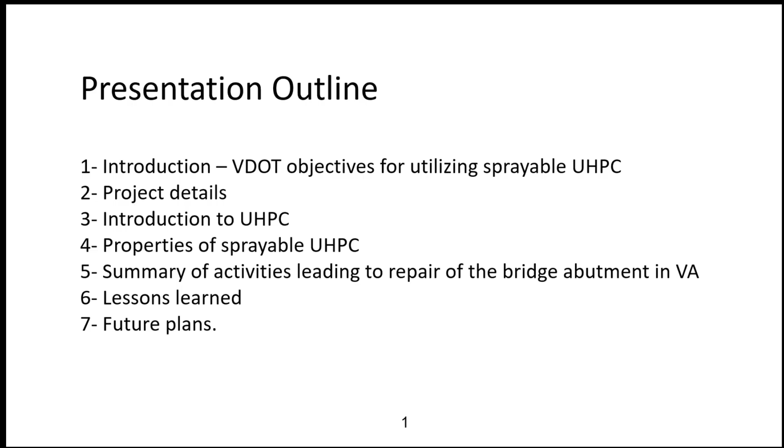So the bridge is located on the ramp, we call it ramp H, and that is from I-495 to US 50 interchange. The 495 is the beltway around Washington, DC, and this bridge is approximately 16 miles from the White House and from the District of Columbia.

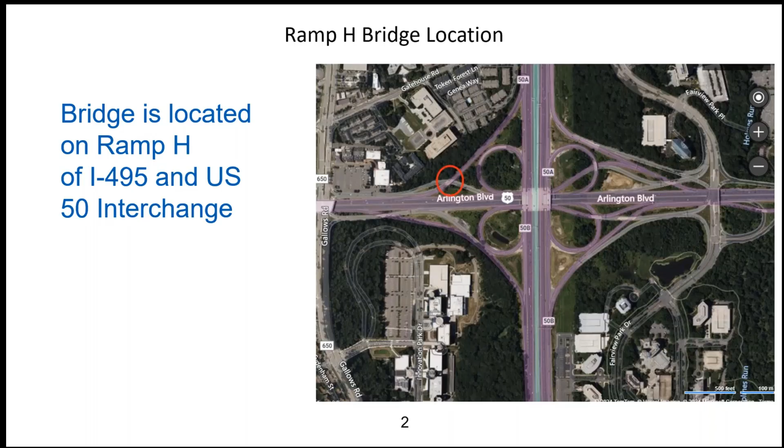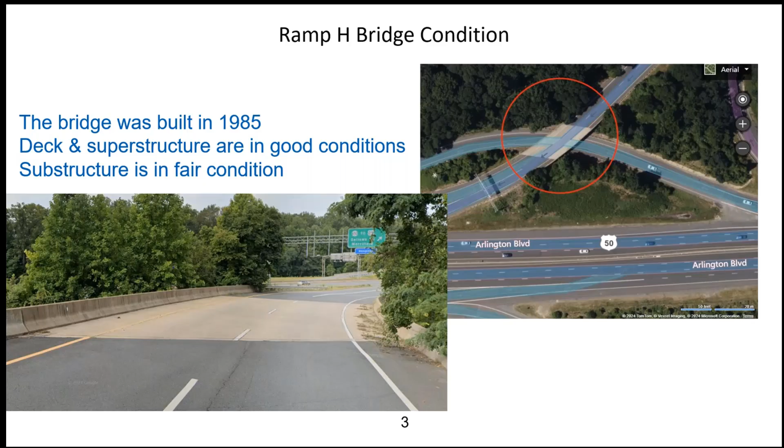Next slide, please. So as you can see in the picture, it's a very busy and congested area where the 495 is a main thoroughfare, the beltway around Washington, DC, and the ramp is ramp H from US 50, which is another busy thoroughfare. So the bridge was built in 1985, and the deck and the superstructure are in good condition. The substructure is in fair condition, and you can see the pictures here.

Next slide, please. So as you approach the bridge, you could look at the abutments as circled in the red square, the areas of the repair, one on the left and one on the right. These are symptoms of leaky joints, where the deicing salts cause corrosion and spalling of the concrete. This is exactly what happened in this case.

And of course, if we repair those abutments, being vertical walls, the repair usually either involves adding concrete cast in place, which means usually a minimum of 4 to 6 inches, which is significant weight and significant effort, and adds dead load to the substructure and the foundation. Or spray applied, or shotcreting, where you can apply a thin layer to provide the protection. In this case, UHPC will provide the protection and restore the durability of the abutment.

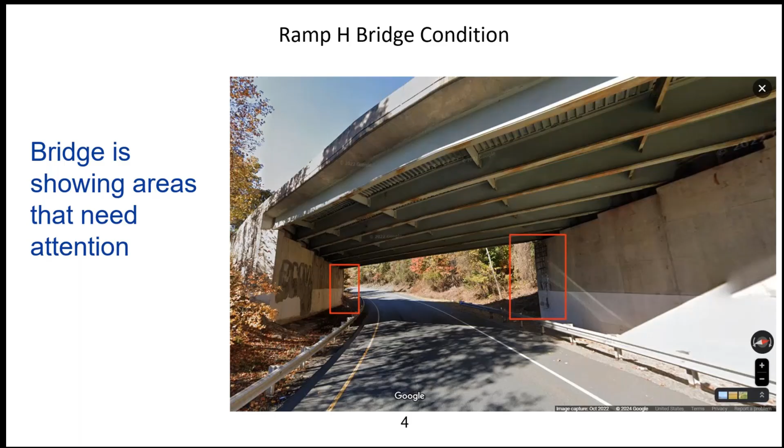Next slide, please. So again, this is a close-up of the repair, and you could see the spalls where the corrosion of the reinforcement is visible.

As preparation to the spray applied, we removed all the loose and delaminated material, and sandblast or pressure wash depending on the case. In this case, it was a sandblast to remove all the loose and corrosive material or corroded steel residues. This is obviously a preservation action where we preserve the bridge for the long term.

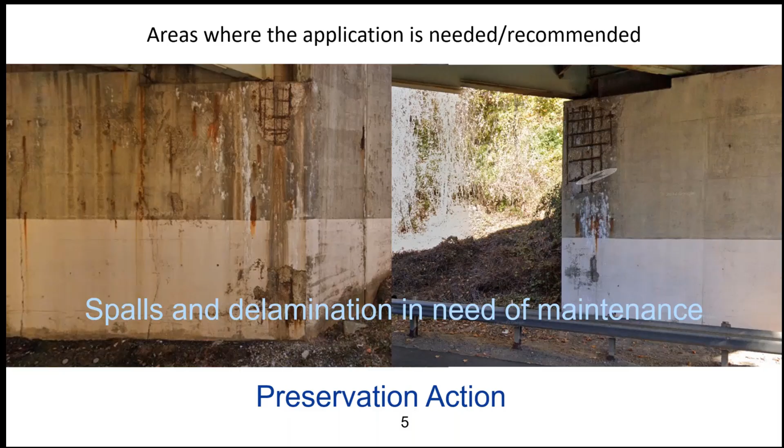Next slide, please. So this is a close-up after the preparation, where you could see all the loose and damaged material has been removed. The steel is exposed, and the bridge is ready to receive the spray-applied UHPC.

And again, one of the main issues, or one of the main preparations, is saturated surface dry, where the concrete is prepared to receive the spray applied UHPC. Next slide, please.

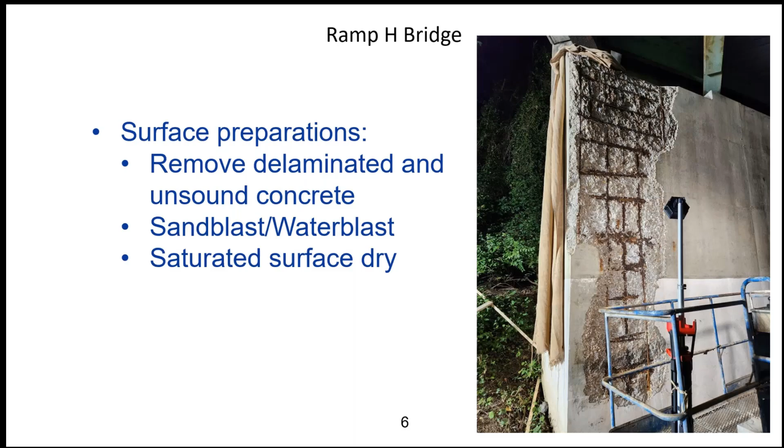So here are pictures of the application, where you have a man lift with the equipment ready for the application. So originally we had one side as a trial test, and the other side was supposed to be the actual repair, but we ended up switching around due to the traffic control.

So the quantities of the material, because the material was brought from FIU on a truck with all that, was not enough to do the entire repair. However, it was good enough to show that the repair actually works, and the spray applied UHPC is a good technology that will provide the protection needed, as well as the restoration of the bridge to serviceable condition.

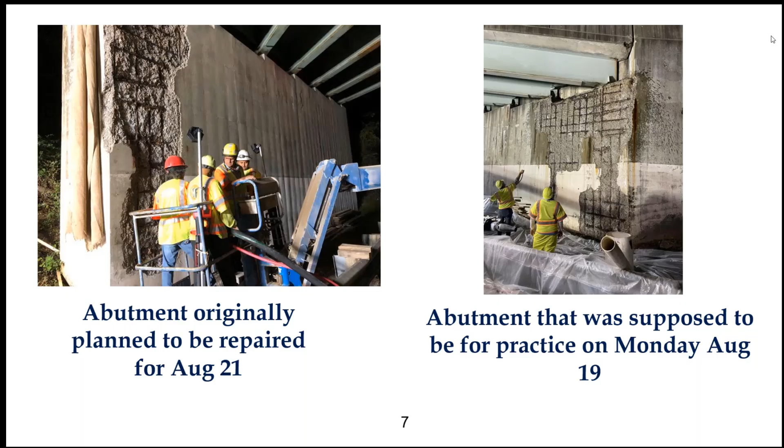At this point, next slide, please. So it would be noteworthy that the FHWA published, in the EDC News Innovation of the Month, the ultra high performance concrete spray applied or sprayable, and it was published on February 6th, for your reference if you would like to look it up and read it. It's a very good technology for the applications that we're referring to.

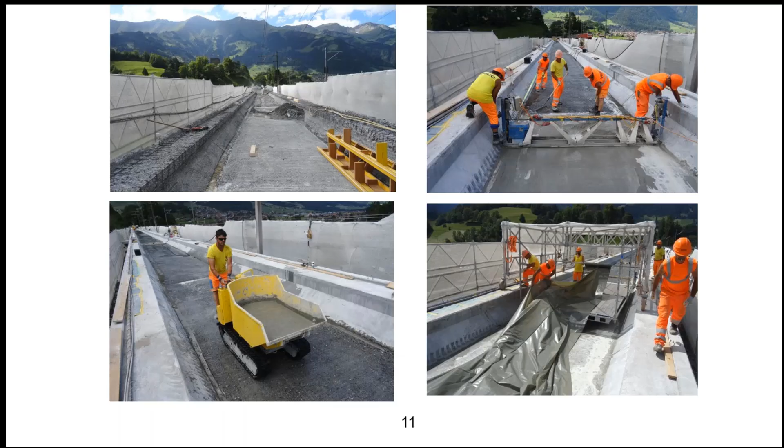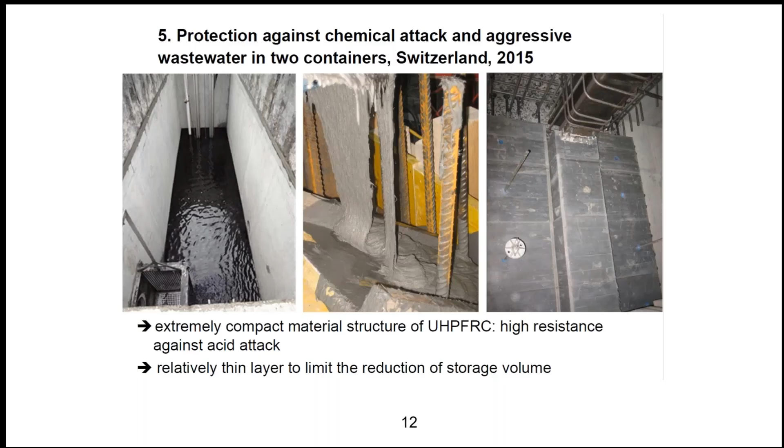So I'll show you some results. The rapid chloride permeability number, the Coulomb number for this material, is very low—less than 100, compared to 3,000 for conventional concrete. That's one of the reasons this material is so durable, and durability is really one of the main reasons we use it. It's a wonderful material for retrofit.

The reason for that is because ultra-performance concrete doesn't have that much water—water-cementitious ratios are in the order of 0.2, 0.18. So if the surface of the conventional concrete you're spraying over isn't adequately moist, at least 24 hours before the spray, it's going to absorb all the little water that's in the UHPC, and that's going to cause a crack.

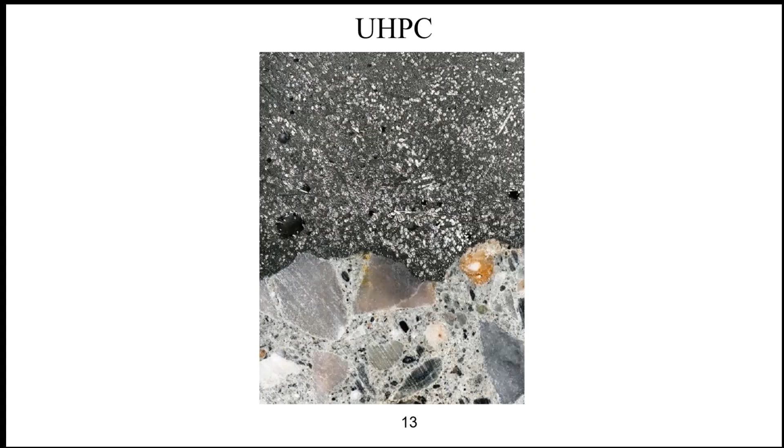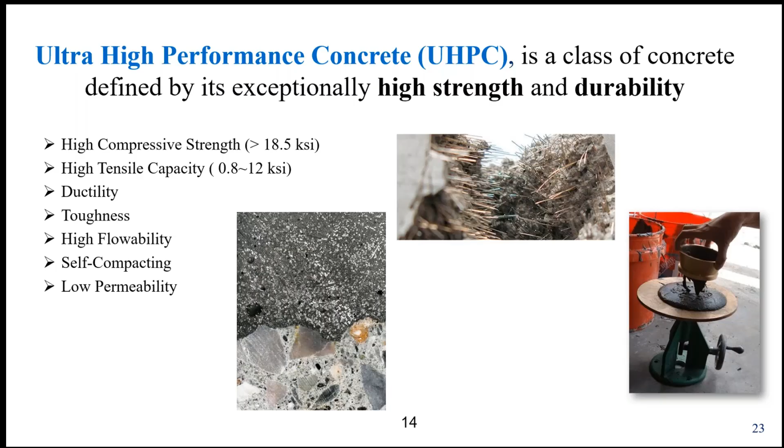Right now, FHWA defines UHPC as a material that must have more than 18.5 KSI compressive strength. But in actuality, you get into 24, 25 KSI at 28 to 56 days. It's very flowable—really, slump doesn't mean much in the case of UHPC, it oozes. When you do the flow table test, for sprayable concrete you need around 6 inches, but for cast-in-place you're looking at something close to 9 inches.

So let me share with you some properties of ultra-performance concrete. At FIU, we are conducting a tremendous amount of work in this area. At IBT, ABCUTC, we have developed open source UHPC for conventional applications and also for sprayable applications.

For conventional applications, without going into too much detail, the cost of the material is a fraction of the commercial version that are available. And we are not the only ones that have developed the open source UHPC. University of Michigan has developed open source, New Mexico has developed, as well as a couple of other universities. I'm pretty sure that by time the cost of the UHPC is going to go down, and as the construction industry gains confidence, I think its application is going to increase.

One of the main reasons for the high cost of the UHPC is really the steel fibers. In one cubic yard of UHPC, we use about 250 pounds of steel fibers.

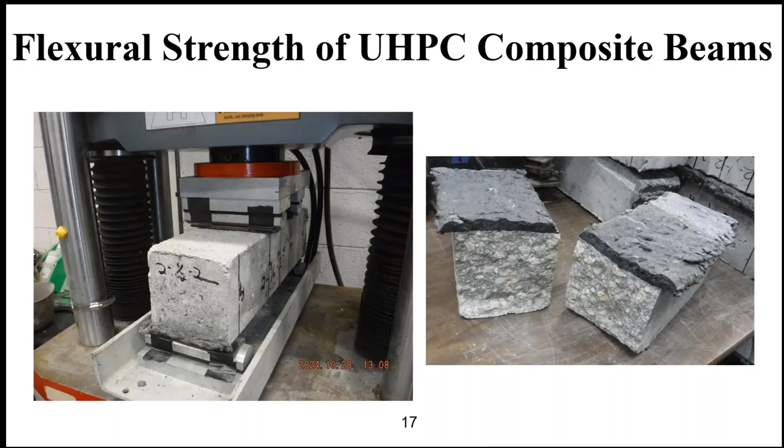Let me just show you some data that we have. These are small beams sprayed with the UHPC, and then tested under 4-point loading. The surface was prepared, the exposed aggregate, it was moist, and then it was sprayed, so no reinforcement, nothing else. You can see that the tensile capacity at the bottom of that beam, or the modulus of rupture, increases by increasing the thickness. For durability applications, I'll show you one means so maybe you can decide what should be the thickness that you should apply.

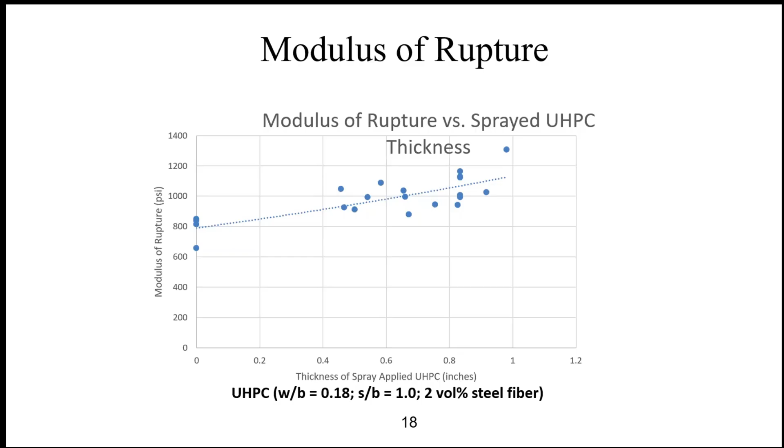We've done quite a bit of testing with the direct pull-off test. Another way, we have sprayed - we've done lots of tests. These are some of the old pictures, actually. We have sprayed the UHPC, and then did a direct tension test, following ASTM C1583. I can tell you that we've never seen the failure take place at the interface between the normal strength concrete and what was sprayed. It's always at the normal strength concrete level. The same results, for cast in place, have been reported by Ben Graybill at FHWA and others.

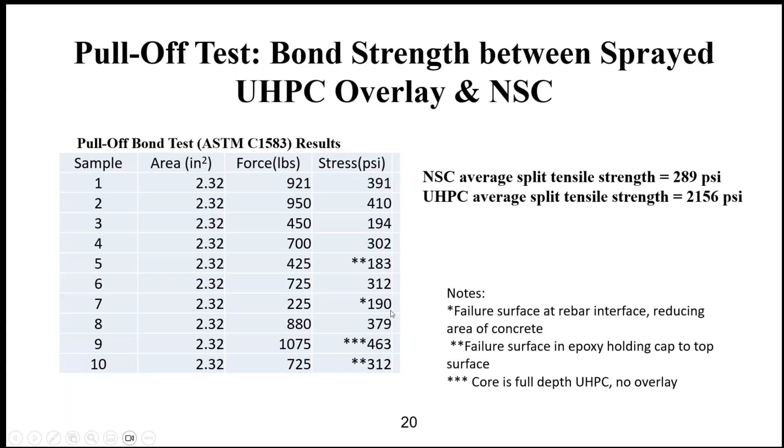That's very good news. You don't have to worry that the bond between the UHPC and the conventional concrete, whether it is sprayed or cast in place, is very strong and adequate, as long as you prepare the surface adequately when you apply the UHPC against it. These are just some of the numbers from the pull-off test - for example, the stresses we obtained were 391, 410 PSI, and so on. Like I said, we never get the failure at the interface.

Some data on the durability. This is work others have done - FHWA, Ben Graybill, and other people have done work in this area, freeze-thaw. This is a standard ASTM freeze-thaw test. These are all UHPC, this is not a spray.

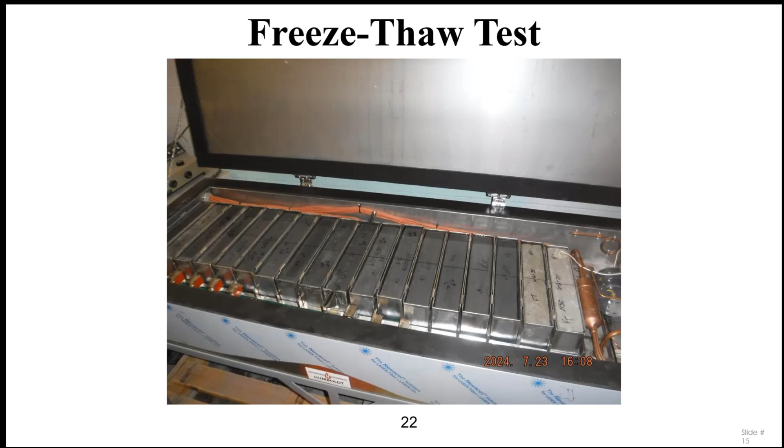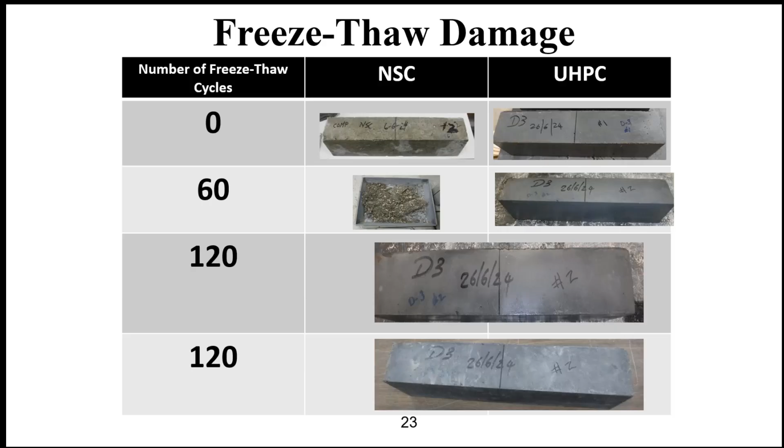Right now we are actually conducting freeze-thaw on non-standard samples - conventional concrete with UHPC applied to it, and we are running it through freeze and thaw cycles. I don't have the data on that, but for all UHPC, even after 365 cycles, absolutely no mass loss, absolutely no damage to the concrete. So the durability of this concrete is really one of its main properties.

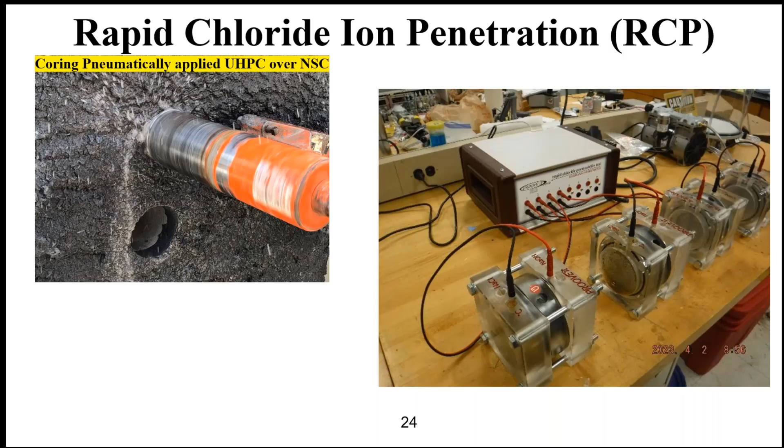We have done some tests where we took cores out of concrete that's been sprayed, and then ran rapid chloride permeability tests on these. This slide kind of shows you the data. For example, with just plain reinforced concrete, the number varies depending on the concrete - 2,000 to 3,000 coulombs, even some very large numbers. But if you apply just 0.5 inch of sprayed UHPC, you can see it's going down. When you get to one inch sprayed, or 0.75 inch, you're really looking at 200-300 coulomb for the RCP numbers.

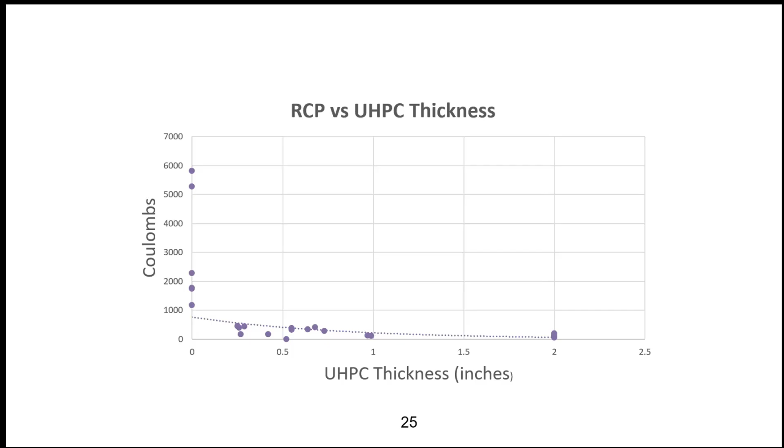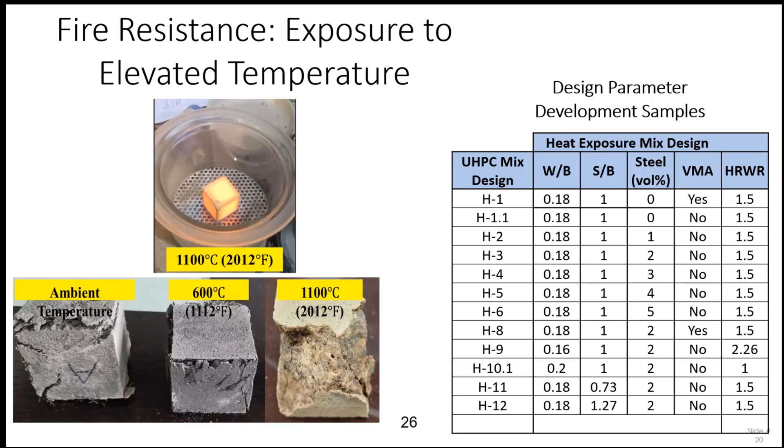We are also doing some fire tests, because there is interest in what happens if an accident occurs - if a fire catches, let's say, in a truck, what will happen? So we are doing fire tests on this material. I don't have the results to show you, but this is some preliminary stuff we've seen. We varied the percentage of the steel. Interestingly, we are seeing that the compressive capacity of the samples - these are cube samples cooked in an oven and then subjected to a compressive test - up to about 300 degrees, if you heat it for a couple of hours then take it out and do a compressive test, the strength actually increases.

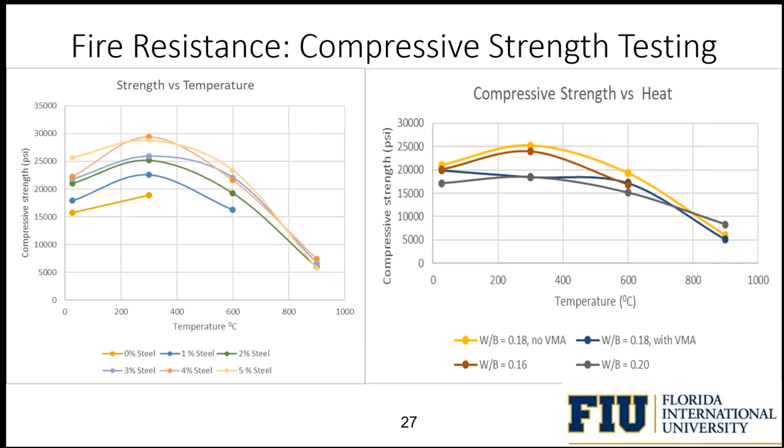We don't quite understand the mechanism of that, but others have reported the same thing. But if you put the cubes and subject them to, say, 800, 900 degree Celsius, cook it for 2 hours, and then take it out and do a test, of course the strength decreases.

Now shotcrete with UHPC. Now, we did quite a bit of work in the lab, and I'm going to show you a video.

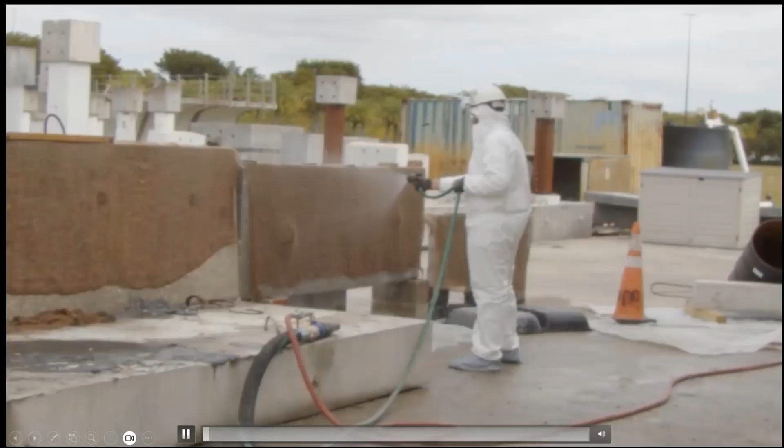Basically, you have to make sure that the aggregate is exposed. You have to make sure that the surface is wet. We have modified our equipment to do the nozzle and so on. Equipment is really key in this case. Of course the mix is important, but having the right equipment matters because this material has lots of steel fibers, and those steel fibers plug the system.

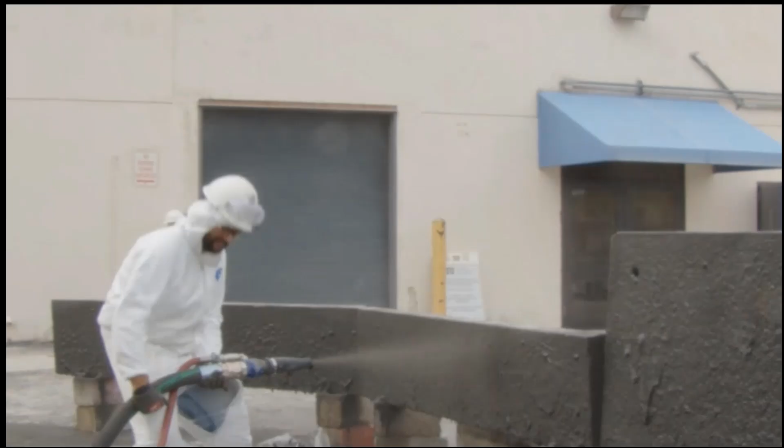But you can see here, I'm just going to show it, you can apply several layers. For example, here you see that we are applying additional layers. But you have to let the first layer dry up a little bit before you apply the next layer. If you use the right mix, the elastic rebound is really minimized.

One of the reasons we started this experiment back in 2018 was, of course, always the question is can you do this successfully in the field? And that was the reason we teamed up with the Virginia DOT with Sam Flaha to do this project.

So what we decided to do, like Sam said, originally we were going to do only the side of the abutment with a small area in need of repair. So based on that, we...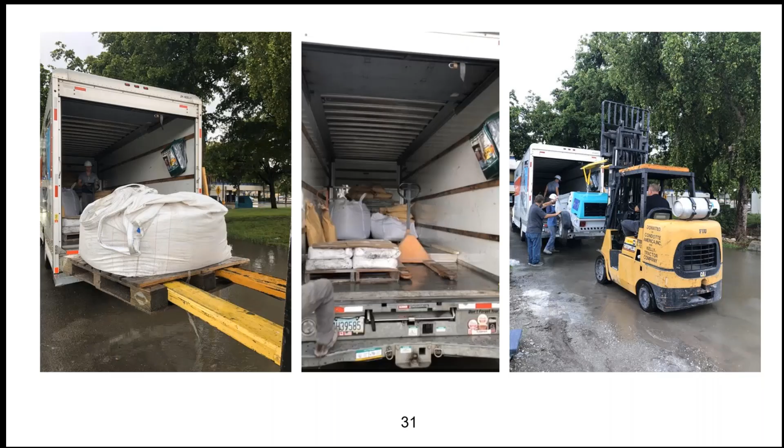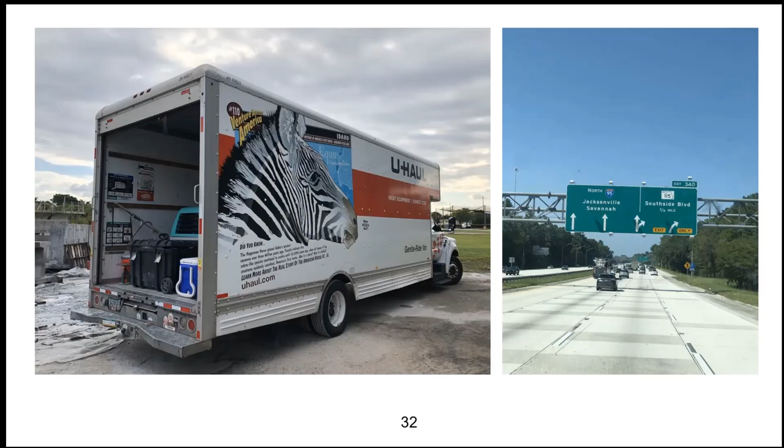Got all the material, and we are using open source. We are using ABC UTC open source UHPC data. This is not a commercial version, just the open source that we have developed, and we measured everything. We shipped it to the Northern Virginia, near Washington DC area, together with our equipment that has been modified.

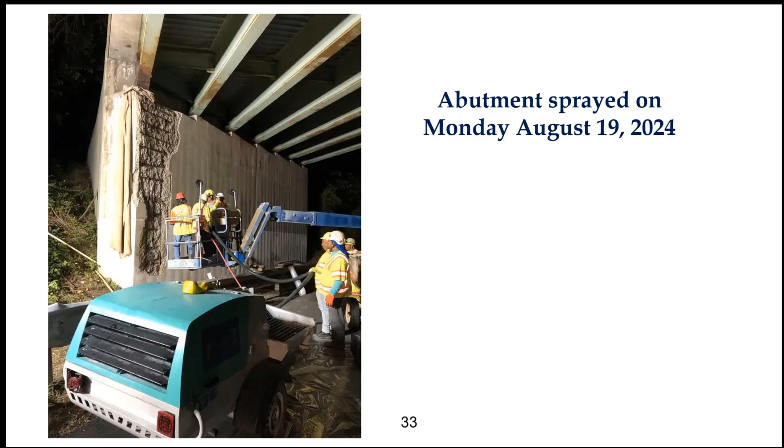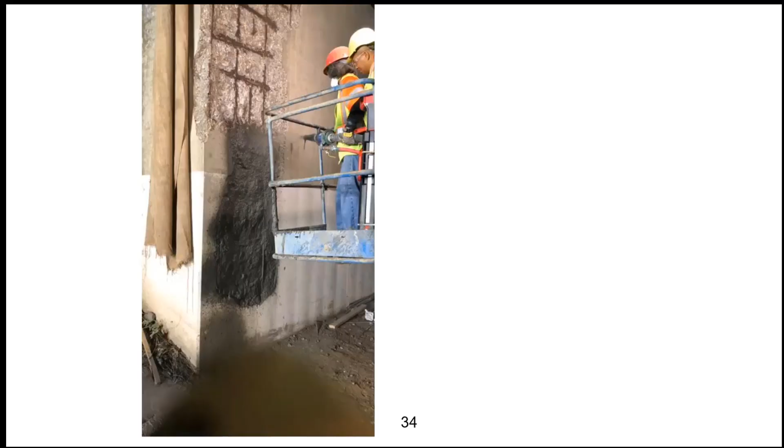So on Monday, August 19, we sprayed this area that you see, and then on Wednesday, August 21st, we did the other area. Here I'm going to show you a few videos of these things, but I'm not going to run it completely. I hope this gives you some ideas.

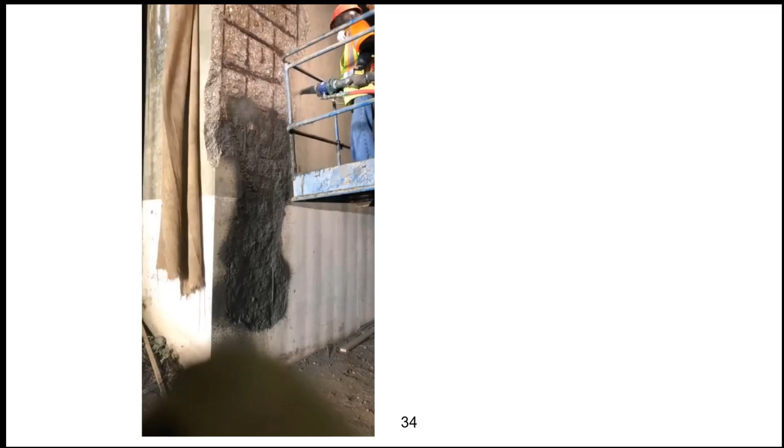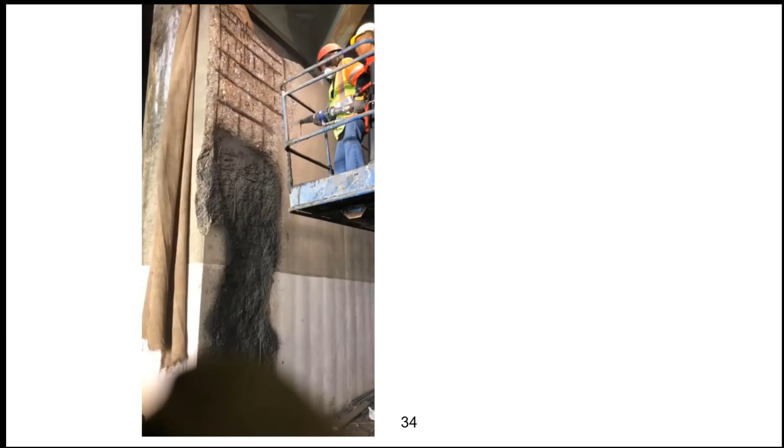By the way, we use the man lift, and the man lift is not really a good platform for spraying. The reason for that is because sometimes when you move the man lift up and down, it really shakes, and that little shake affects things.

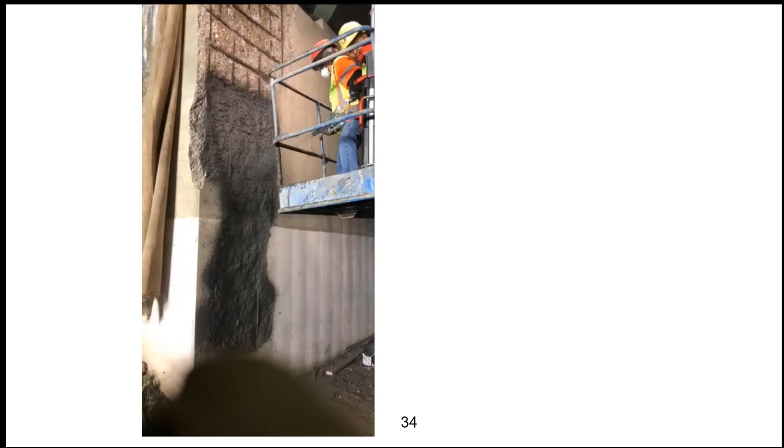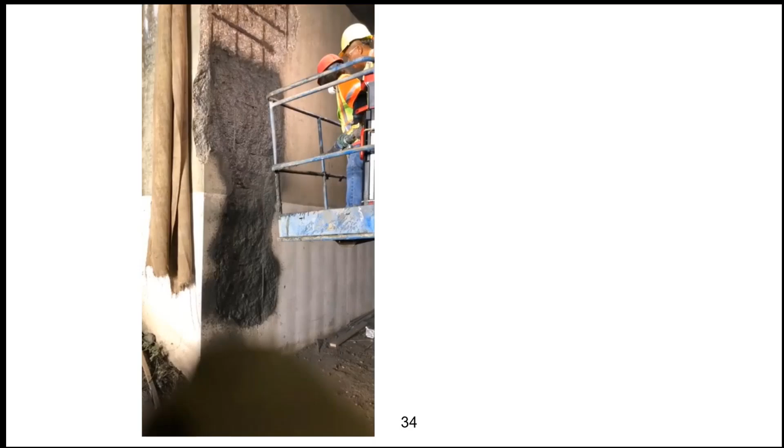But you can see over here that we are applying this UHPC layer by layer. The larger the area is, the better off you're going to be, because by the time you go from one end to another end, that will give you the chance to dry the material.

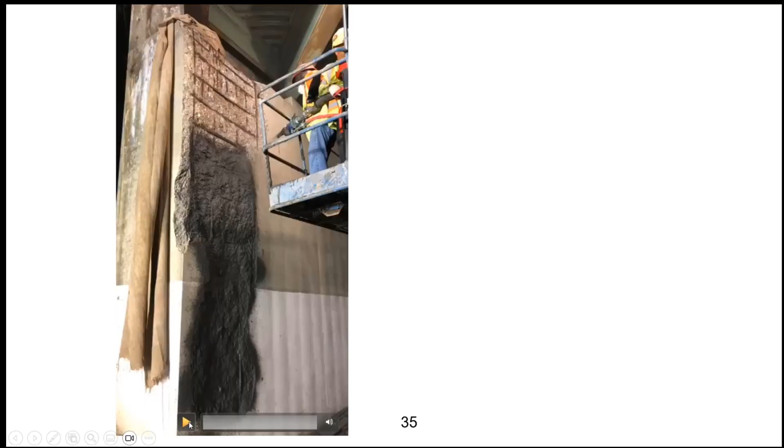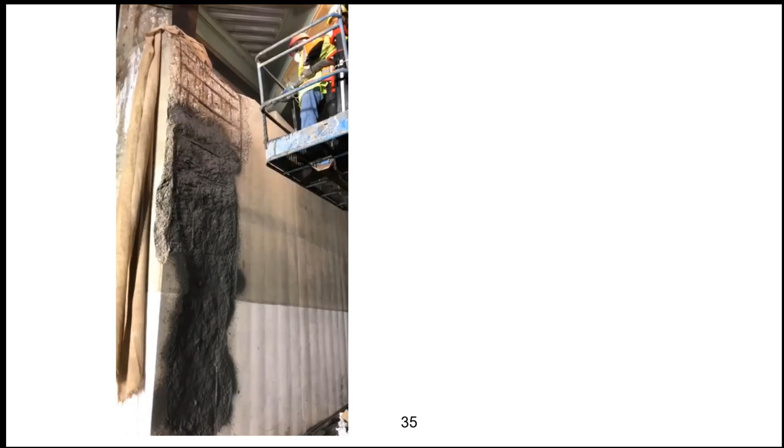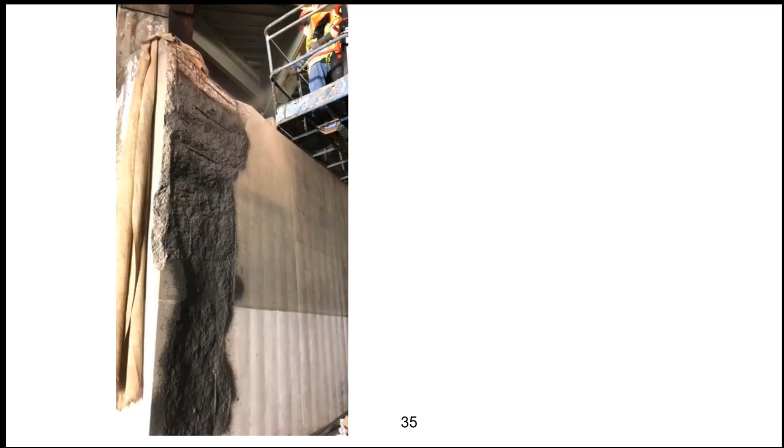This is the same abutment still. Because we had limited materials, I didn't want to repair all of this one, but on that day we did have some extra material. We said, well, let's go ahead and just spray a little bit on the rest of the abutment. So you can see that here.

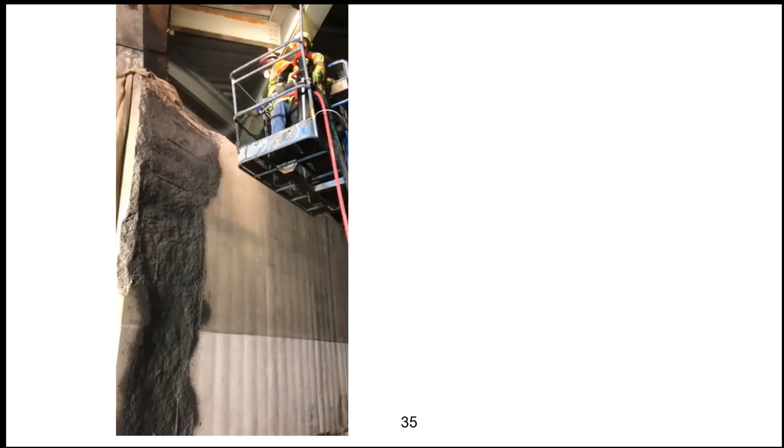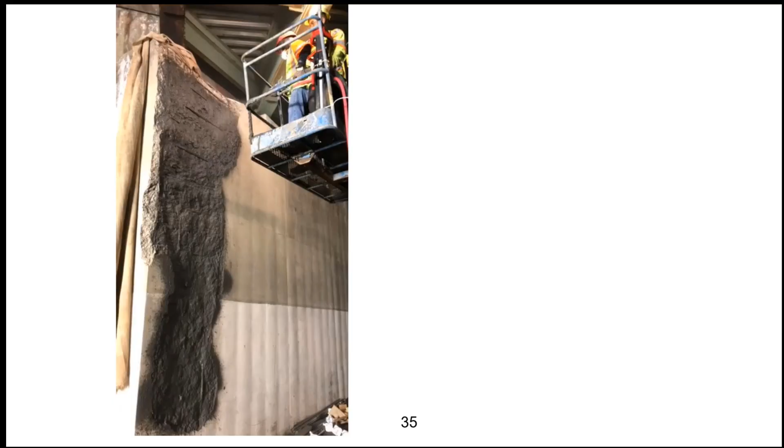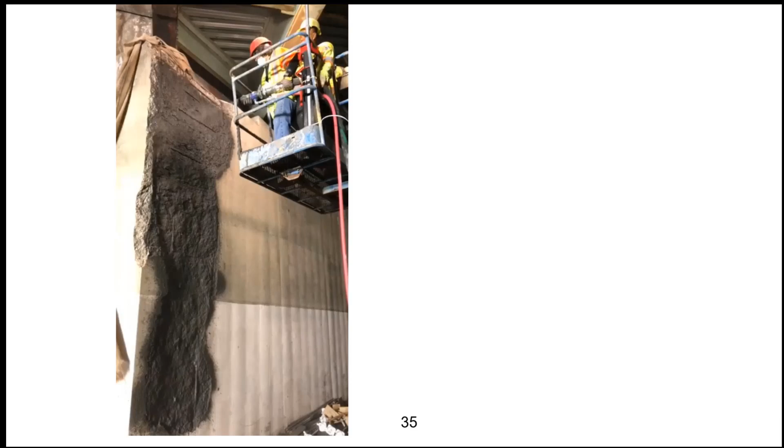And to your no surprise, the nozzle man is none other than Dr. Azizinamini himself. Later I learned that you have to have a certification to be a nozzle man, so I guess I was an illegal nozzle man. But nevertheless, I decided to do this one myself because it was the first application, and we had experimented a lot in the lab.

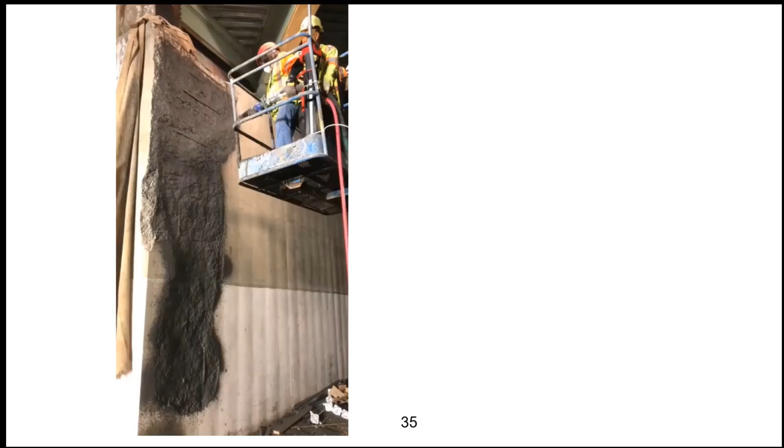Now here is the abutment that we fixed. This was supposed to be the experiment, but as you can see, it's a very large area, and you needed lots of material, but we did not have enough. I think we used about 40 cubic feet of UHPC, and to do both abutments, the whole area, you needed at least about 100 cubic feet, almost 4 cubic yards of UHPC. We didn't have that much material, so they sandblasted it and exposed it.

Now, when you design an abutment, you put a minimal amount of reinforcement, so it's not that critical, especially in non-seismic areas. We did ask them if they wanted to add new reinforcement, but they decided just to keep the reinforcement as is, expose the aggregate, wet the concrete, and it was ready to go.

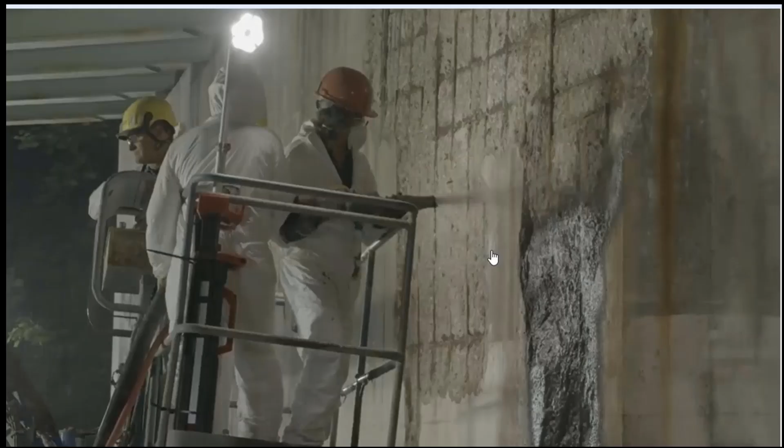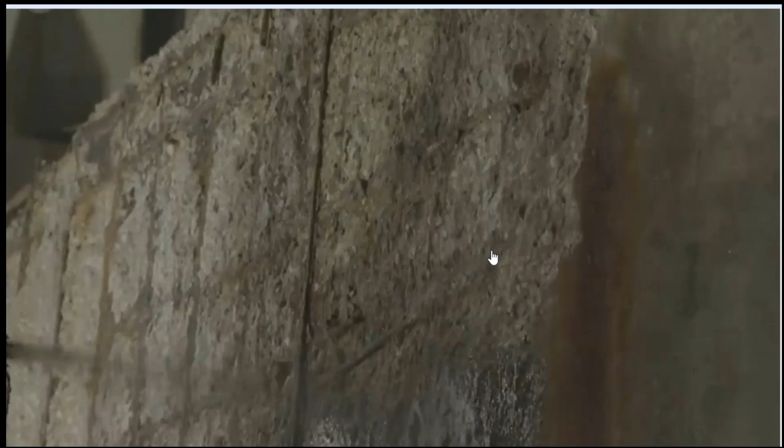Here's another video. So as you can see, this is after applying it. In some places we had more than 1 inch, going back and forth with several layers. When you apply this spray, you go from one end to another. The larger the area is, the more chance the material applied to the first region has to dry up before you come back. So if you apply layer by layer, you have to let the first layer dry a little before going to the second layer. So this is another area.

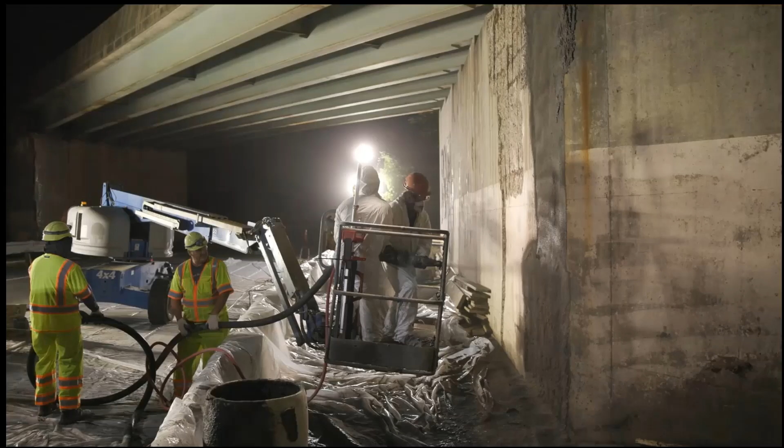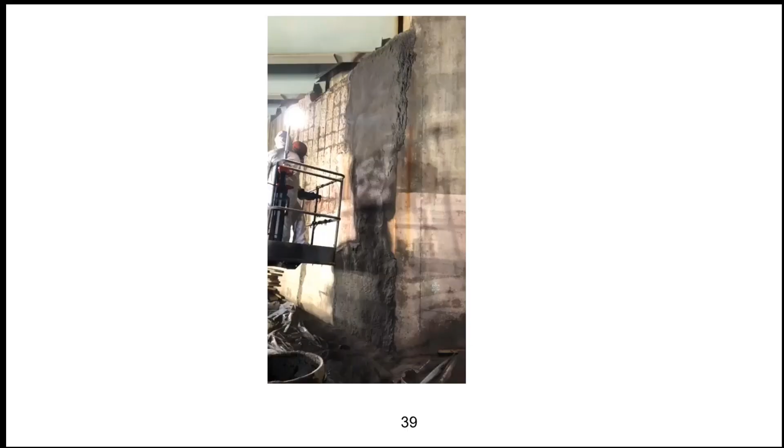So as you can see, there is really no elastic rebound. So, finally, this is another shot.

And finally we applied this curing compound, a white pigmented wax-based curing compound. We were super conservative with respect to curing. We applied the curing compound, then put on wet burlap and a plastic sheet. You don't need to do that, but we decided to, just to prevent potential cracking and so on.

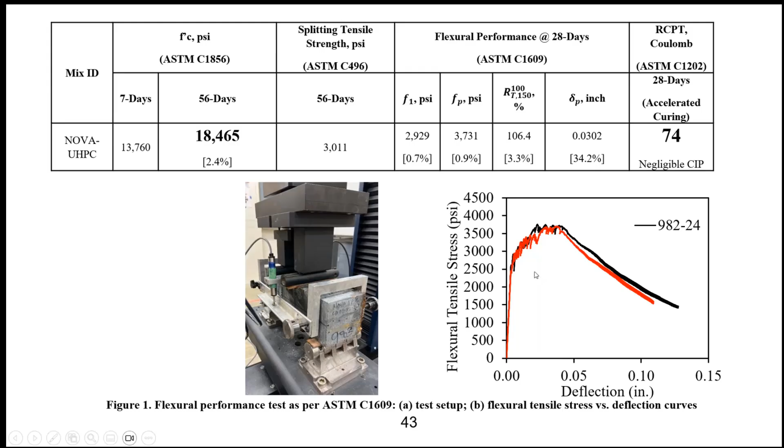Okay, now let me move on. I want to spend a little time on the lessons learned. I always say that a sprayable UHPC, you need to approach as a system. What do I mean by that? In a system you've got so many elements - the equipment, the personnel, the material, the operation steps - everything has to be very well organized. If one element doesn't work, the whole system fails.

And that's probably one of the reasons why this hasn't been applied successfully in the field so far, at least by August. We were able to apply this successfully in field conditions for the first time. So that's what I'm saying - it's a system. This is not something where you read a manual, go in the field, and just apply it. It doesn't work that way.

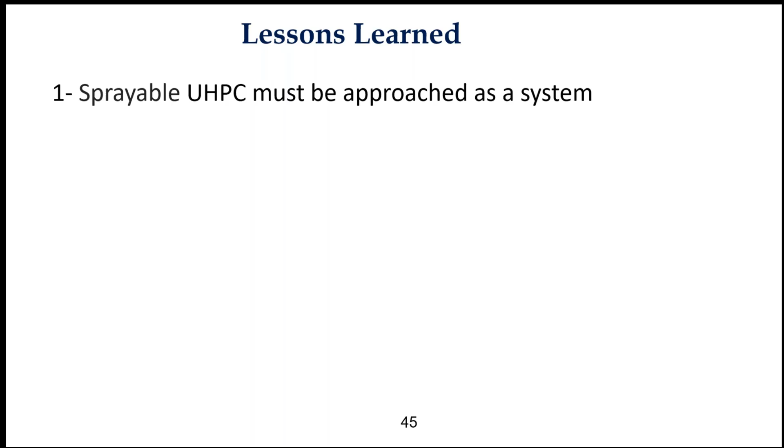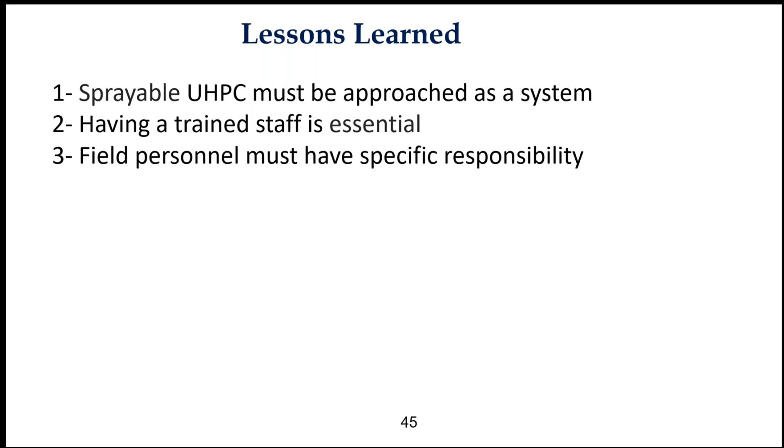Having a trained staff is very important. You don't need too many people - if the staff is trained, you don't need too many people on the job site. In fact, if you have too many people, it may actually be harmful to the operations. Field personnel have to have a specific responsibility so nobody steps on each other's toes. This is based on the experience we had in this operation, and I'm pretty sure others could add or subtract from this list.

So one person needs to have an overview of the other operations - for example, when the concrete from the mixer is going to go to the pump so that you can pump it.

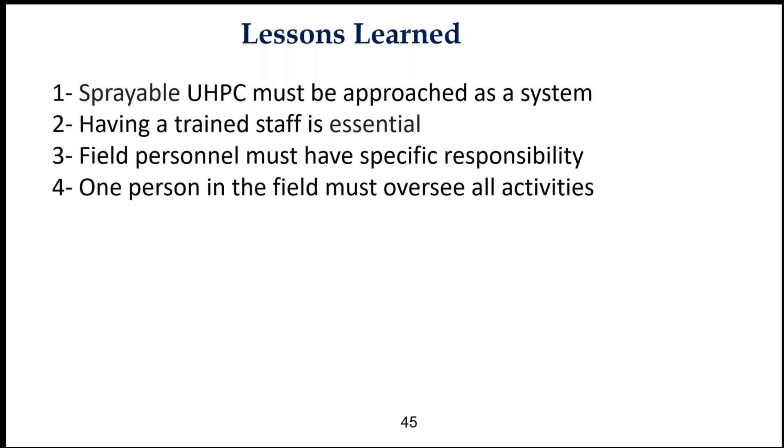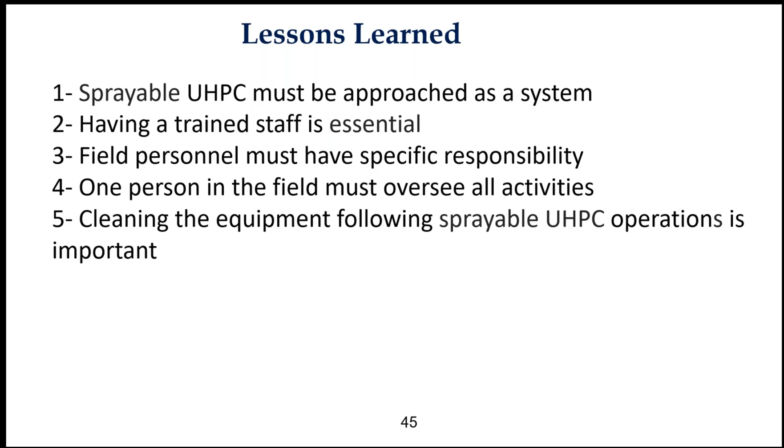If there is a problem, what you should do, and so on. Cleaning the equipment following the spray is very important. This material sets very fast, and you cannot wait. The open time for this operation is maybe about half an hour, and that dictates how much material you need to fix, how much of the area you're going to fix, and so on. So this is a very important aspect, the cleaning. If you don't clean it, it's going to ruin your operation.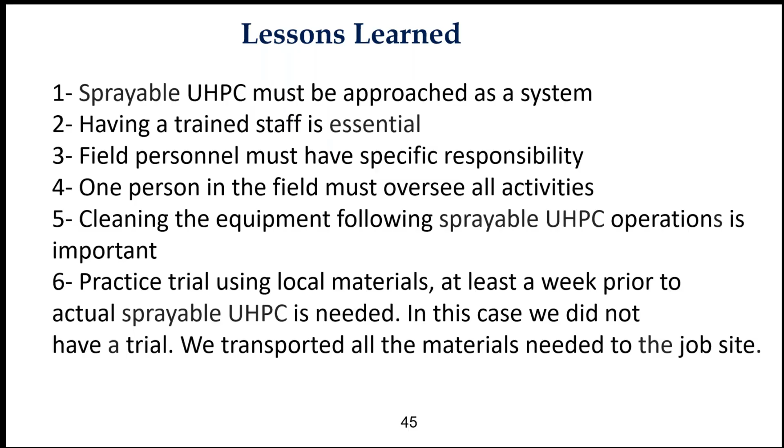Practice trial, even if the staff is trained, the practice trial is really important. You need to have a practice trial. Maybe you get to the point that finally you say, okay, I don't need a practice because I've done it so many times, I feel easier.

This is important for UHPC, and this is general, not just UHPC, for the spray. If you use a mixer, you have to use one that can put lots of energy in. We took all the equipment with us except the mixer, and we asked the Virginia DOT to give us basically the mixer. The mixer was a little bit small. We couldn't mix more than 8 cubic feet, and that was the limit. So the rule of thumb is, if you want to use a mixer that is used for conventional concrete, you really should not mix more than half the capacity of the mixer if you're using it for UHPC. Try to get a mixer that is specific for UHPC, with paddles in a format that puts lots of energy into the mix.

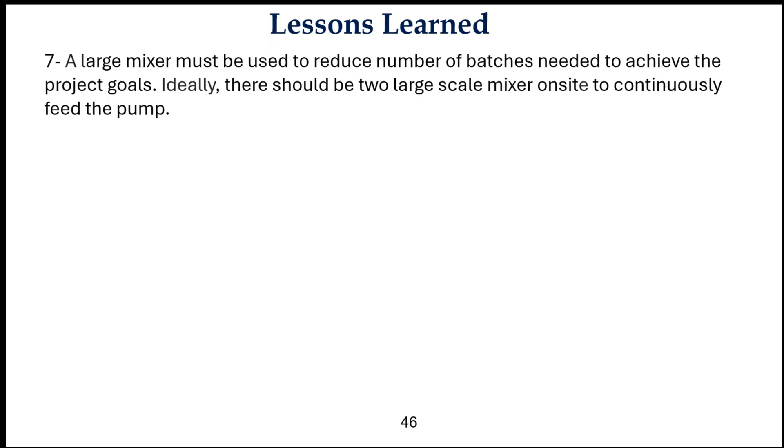Now, about open source. The open source UHPC is available, but the sprayable UHPC is not. Open source UHPC needs to be modified in order to really use it for the spray applications. Another thing you need to notice, there could be significant difference between what you do in the lab with a small mix and the mix with a large batch. You can get completely different timing for the mixing needs and so on.

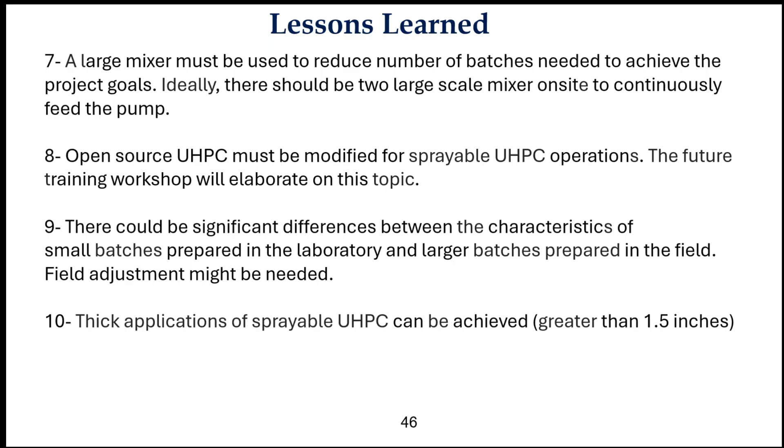You can apply large thickness. I would say probably inch and a half. Even probably you can do more than that.

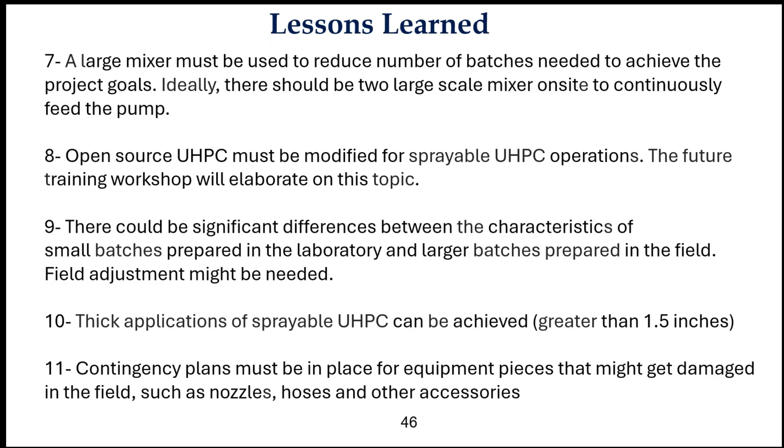This is very important: a contingency plan needs to be there. For example, we took extra nozzles, we took extra hoses with ourselves, just in case our nozzle gets plugged up or hoses get plugged up, so we can replace it immediately.

The platform, I discussed that. And then finally, the sprayable UHPC is feasible. You just have to make sure that you are trained, you have trained staff, and you have the right equipment and the right operation steps.

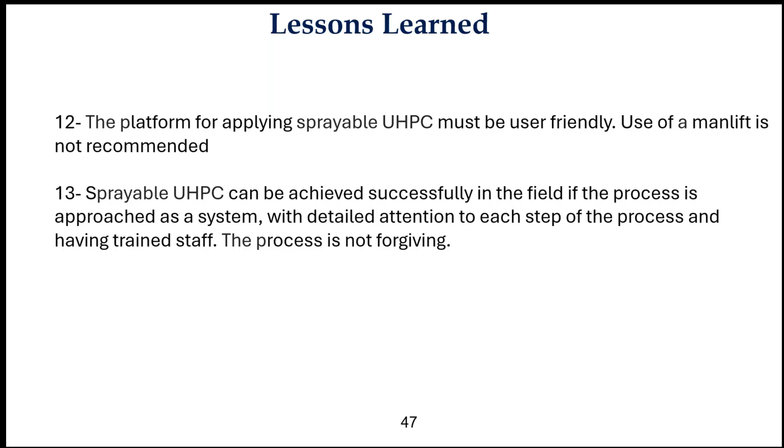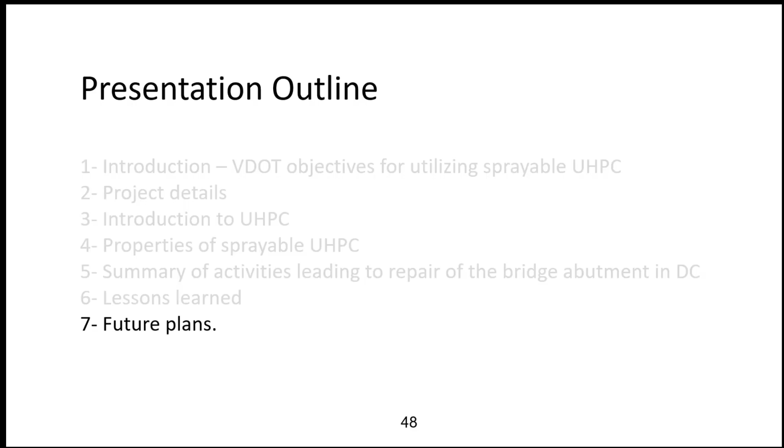Right now, actually, our future plan is we are using it for shotcrete steel culverts. So we are doing experiments. Actually, it's ready to repair steel culverts with the sprayable UHPC.

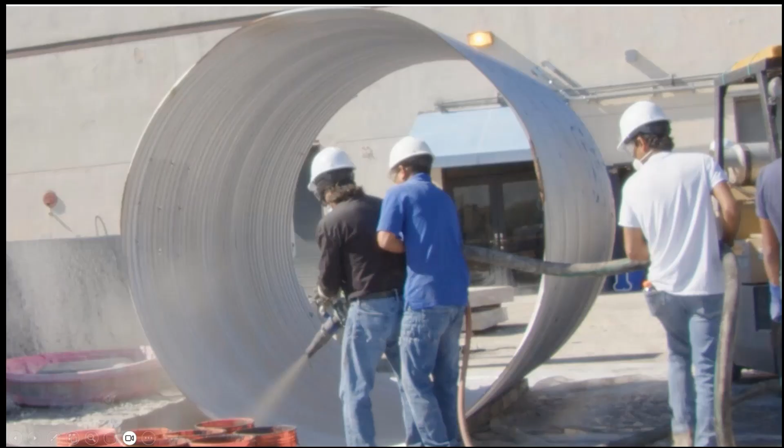I'll show you, this is the very first time that we did that, several months ago. I'm just going to show you that you can even spray overhead. So you're going to see this short video of me spraying the UHPC. I'm going to spray just a small portion of it, but I'm also going to spray the overhead. It's very interesting that it sticks to the steel culverts, and the corrugation actually helps.

You can't see it, but actually there's a region there where we put some mesh that we shotcrete over. So I'm trying right now, basically I'm spraying the UHPC. You have to apply this material in thin layers. So here you see the overhead application.

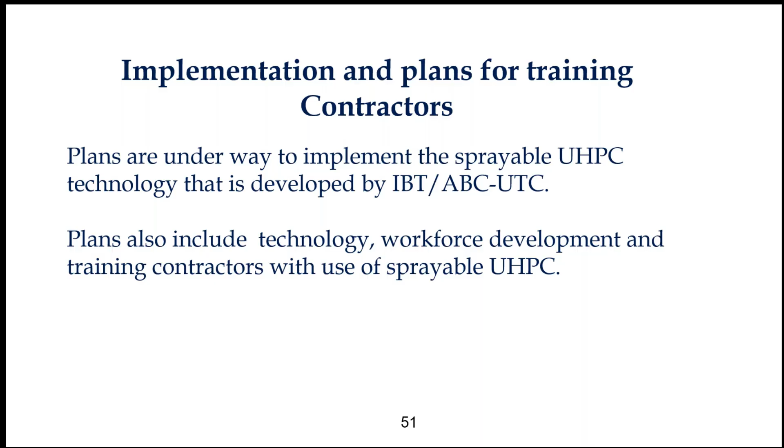Our plan right now is we have received the resources to actually start implementing this in the field, and also train the contractors. One of the implementations is to fabricate a mobile unit that has everything you need in order to do a sprayable UHPC. This unit will probably be completed within the next, I would say, 7-8 months. The work is in progress. It's going to have basically the pump, the compressor.

It's going to have hydro demolition equipment that you can take into the field to remove contaminated concrete to the extent that you want. And it's going to have silos to store most of the material. Most likely the sand will be a local material brought on site, but things like silica fume, slag, super plasticizer, and admixtures for the spray and water will be housed in the silos in the unit.

It's going to have a computerized system to keep track of what is being mixed. And like I said, the mixer, the air compressor, and the pump, basically everything—hoses and all.

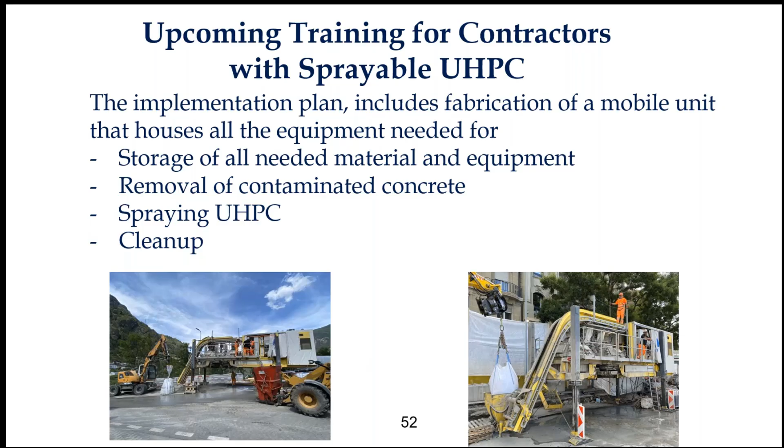So stay tuned. Also, as part of the implementation of this technology, we are scheduled to conduct educational workshops for the construction community about the sprayable UHPC. Like I said, this is not something you can just read the manual and run with—it's something you really have to be trained on, and that's one of the objectives of this workshop. I foresee it being a regular workshop followed by hands-on experiments. So with that, that ends my presentation.

Great, thank you, Atorod. That is really a great example of implementable technology. I can think of numerous locations in my state where this technology could be a great solution. So thank you again for the information.

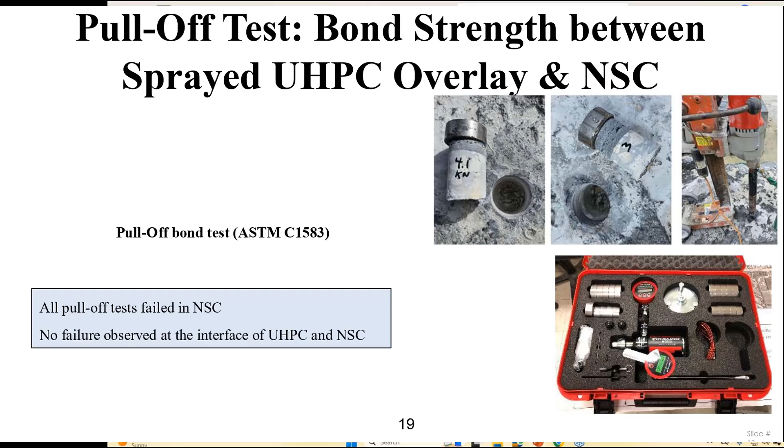I'm pretty sure there are some entities out there trying, but I can speak on what we are doing. We are trying to take it to the market. We've received some resources to do that, and that exercise includes having a unit that can go to the field and do all the jobs, and also training the contractors. One of our objectives is to have this workshop and train contractors, which will involve some agreements and so on, but the hope is that we get more contractors familiar with this technology, and also share detailed information with respect to equipment and so on. If you are interested, please send me an email, I put my email at the very end, this is the last slide I showed. Send me an email, because we are hoping to start this workshop within the next few months in different regions of the country.

There's a question about removal of concrete to 1 inch below the rebar, which is usually done for conventional repair or patches, where they remove the concrete 1 inch below the reinforcements. Yes.

Did you have to, is it needed here in this application? No, it's not, good question. In some structures I saw in Europe, if the reinforcement is part of the main load carrying capacity of the system, you need to remove the contaminated concrete, maybe half inch, three quarter, or one inch beyond that reinforcement. Then cast or spray the UHPC, because the UHPC will protect that reinforcement from all sides. But if that reinforcement is important to structural integrity, you do have to remove the contaminated concrete. It's a good exercise. I think removing that contaminated concrete behind the reinforcement and making sure the UHPC goes there is a better option than anything else. That was a good question.